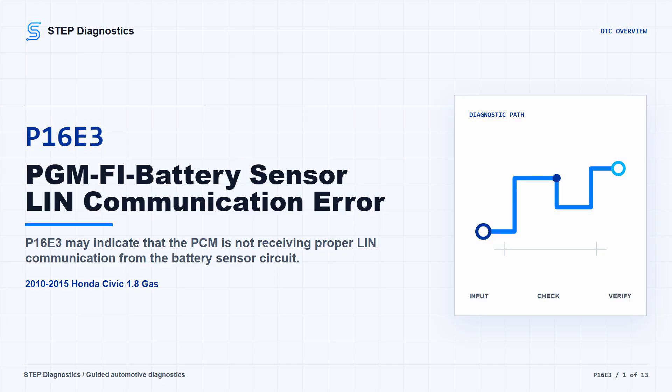The vehicle may have charging system or battery management behavior that feels intermittent, and the possible fault areas can include the battery sensor connection, sensor power feed, LIN wiring, the alternator side of the LIN circuit, or the PCM side of the circuit. Before getting deep into testing, start with the basic system checks, follow a structured diagnostic approach, and make sure the battery sensor terminals at the battery negative terminal are not loose.

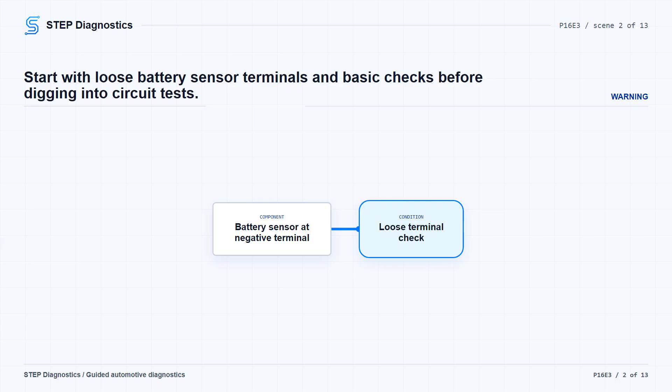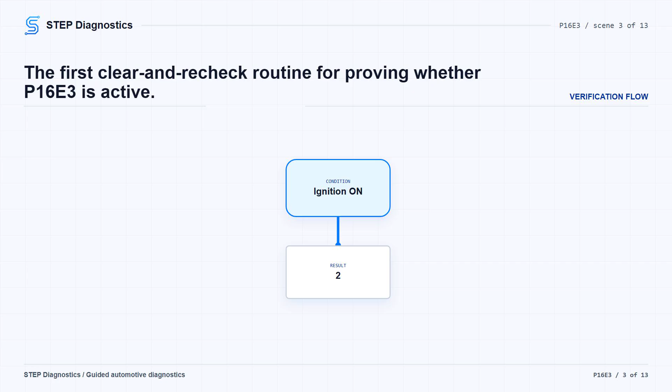Start by verifying the problem. Turn the ignition switch to on Roman 2, or use the engine start-stop button to select on mode. Clear the DTC with the HDS, wait for 10 seconds, and then check for pending or confirmed DTCs with the HDS. If P16E3 comes right back, continue with the diagnostic path.

If P16E3 is not indicated, treat it as an intermittent at this time. Check for poor connections or loose terminals at the alternator, battery sensor, and PCM. If captured data is available, try to reproduce the failure under those same conditions instead of guessing.

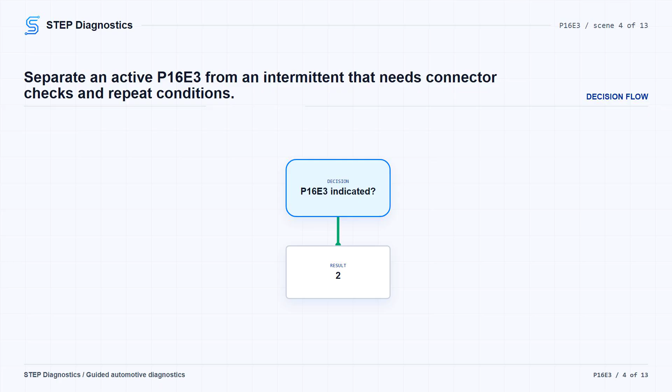Next, check the pending and confirmed codes again with the HDS. If the companion communication code is also present, the path goes toward the sensor power fuse and a LIN short check. If that companion code is not present, skip ahead to the battery sensor power feed check, and then the LIN open check. This keeps the diagnosis on the branch that matches what the car is actually reporting.

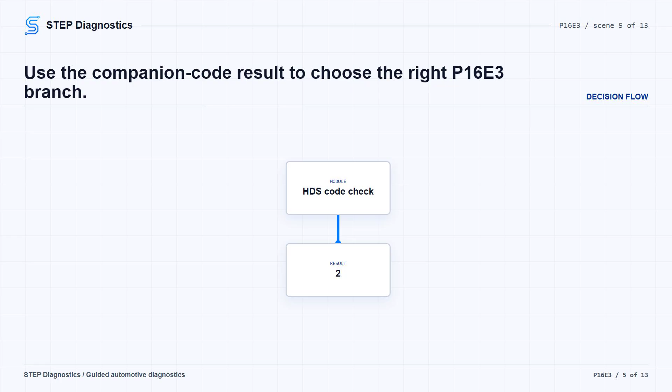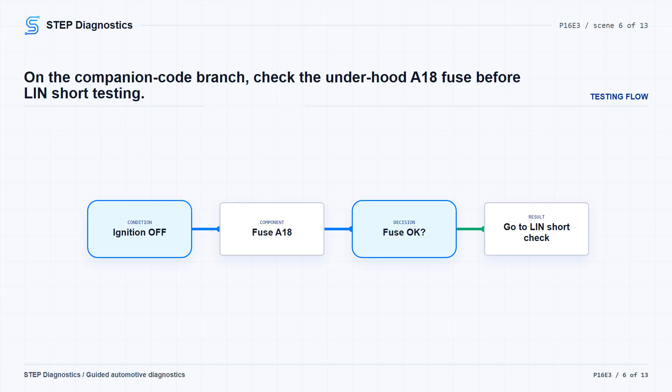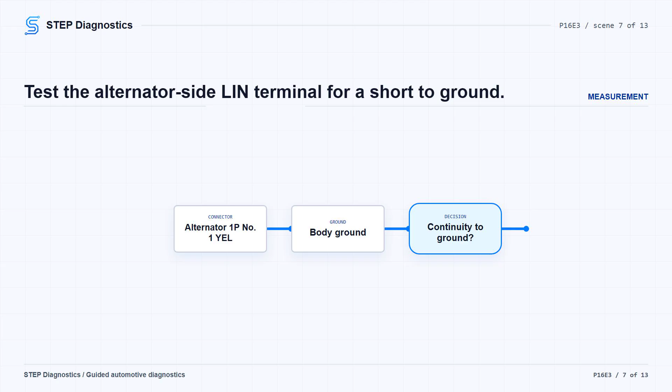A1810A fuse. Still in lock 0 or OFF mode, disconnect the alternator 1P connector. Check for continuity between alternator 1P connector no. 1, the YEL wire, and body ground. If there is no continuity, the path moves to the LIN open check at the PCM and battery sensor. If there is continuity, keep going and isolate what is pulling the LIN line to ground.

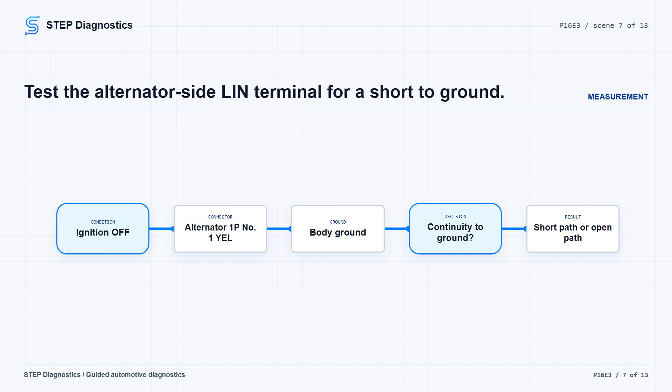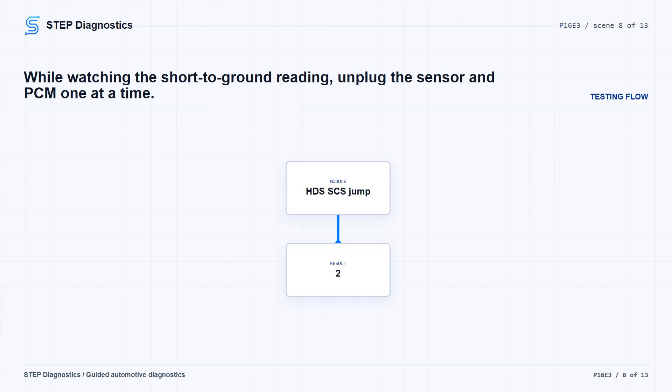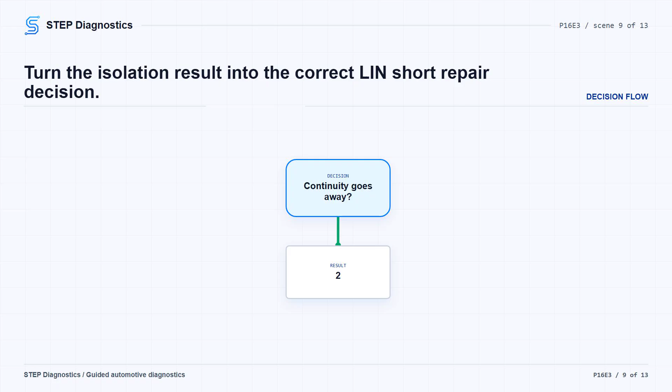Jump the SCS line with the HDS. Continue checking continuity between the alternator 1P connector terminal and body ground while disconnecting the battery sensor 2P connector and PCM connector B, the 51P connector, one at a time. If continuity goes away when one of those connectors is disconnected, the LIN wire is OK, and the part on that branch is the one called out by the test. If continuity does not go away, repair the short in the LIN wire between the battery sensor, alternator, and PCM-B31.

On the other branch, disconnect the battery sensor 2P connector. With the ignition in lock 0 or OFF mode, measure voltage between battery sensor 2P connector no. 1, the WHT wire, and body ground. If battery voltage is present, the +B horn wire is OK, and the next check is the LIN line. If battery voltage is not present, repair the open in the +B horn wire between the battery sensor and the no. A1810A fuse in the underhood fuse and relay box, and also check the no.

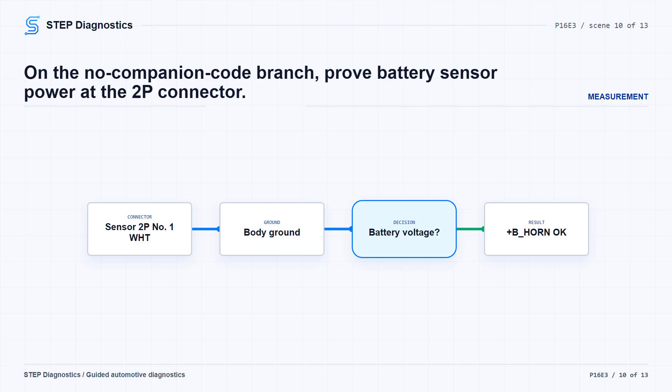A1810A fuse. Jump the SCS line with the HDS. Disconnect PCM connector B, the 51P connector, with the battery sensor 2P connector disconnected. Check for continuity between PCM connector B no. 31, the YEL wire, and battery sensor 2P connector no. 2, the GRN wire. If there is continuity, the LIN wire is OK, and the diagnostic path calls for replacing the battery sensor. If there is no continuity, repair the open in the LIN wire between the battery sensor and PCM-B31.

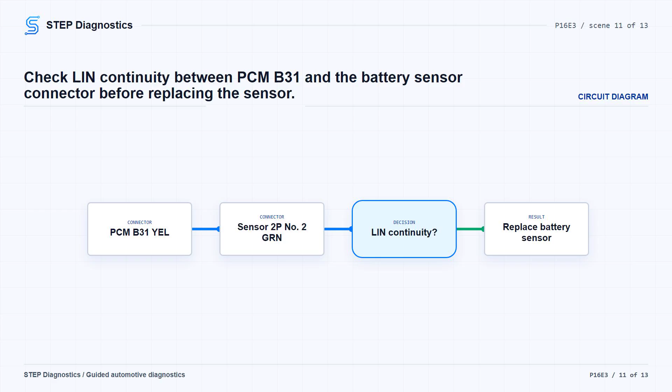If the earlier alternator LIN check sent you down this path, jump the SCS line with the HDS, disconnect the battery sensor 2P connector and PCM connector B, and check continuity between PCM connector B no. 31, the YEL wire, and battery sensor 2P connector no. 2, the GRN wire. If there is no continuity, repair the open in the LIN wire between the battery sensor and PCM-B31. If there is continuity, the LIN wire is okay.

Update the PCM if it does not have the latest software, or substitute a known good PCM. If P16E3 goes away after the PCM update, the troubleshooting is complete. If P16E3 goes away with the known good PCM substituted, replace the original PCM.

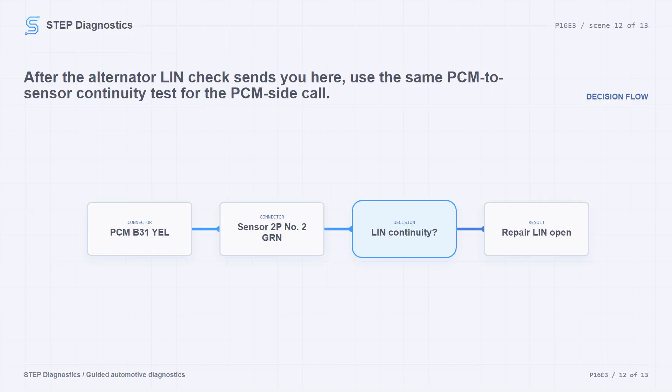Keep the final confirmation separate from the circuit testing. Use the same clear-and-recheck approach. Clear the DTC with the HDS, wait for 10 seconds and check pending and confirmed DTCs again. The key with P16E3 is to let the code combination guide the branch, then prove power, prove the LIN line is not shorted or open, and only then make the sensor or PCM call that the test path supports.